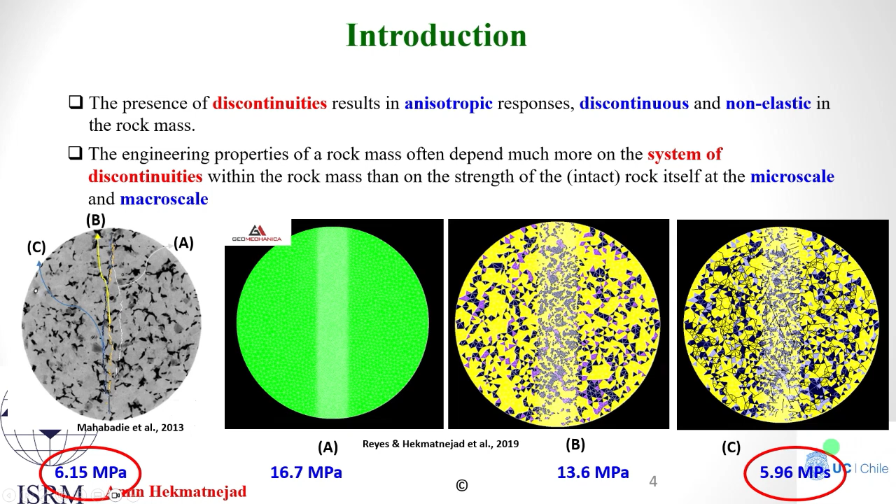We saw incorporating the mineral heterogeneity reduces the error, and incorporating both microcracks and mineral heterogeneity gives us quite better results. And as you can see, the most notable improvement is achieved when microcracks in experiment C are integrated into the model, highlighting the critical influence of the discontinuity system on the actual behavior of rock material.

Moving forward, let's explore how the fracture system influences the perturbation of induced stress, which in turn affects the depth and shape of the induced damage zone around a tunnel. This discussion is informed by research of Lei et al., which examines the impact of natural discontinuities on the stress and damage induced around a tunnel.

This series of experiments, here 9 experiments, illustrates a consistent setup. A circular tunnel with a diameter of 4 meters within a study area of 40 by 40 meters, all subjected to the same stress field with principal stress components of 8 megapascal vertically and 16 megapascal horizontally.

The variable across these 9 experiments is the fracture system parameters, particularly the size of the fracture, which is controlled by factor A, which belongs to the power distribution. The higher value of A means the smaller size of the fractures, and the smaller value of A means larger fracture length.

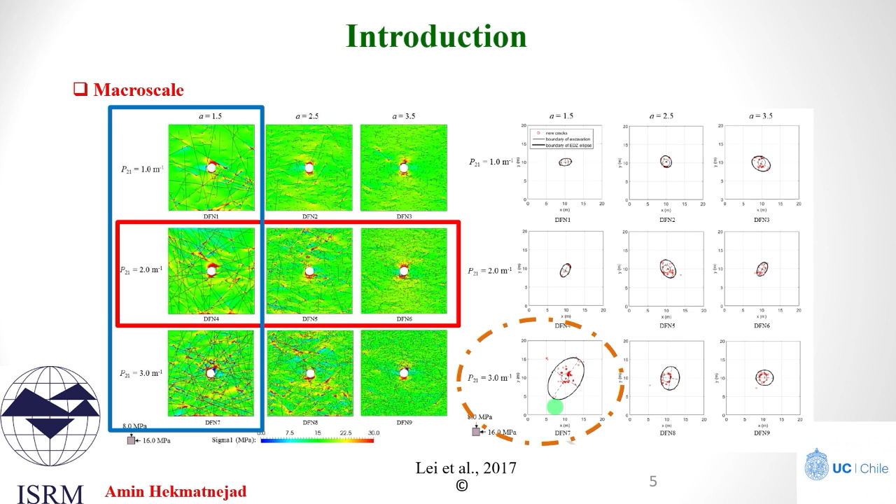In this slide, we introduce the continuous damage model. Referring to this picture, SD denotes the damage area of a specimen. In our model, we consider only fractures as forms of damage, as you can see here, characterized by having two dimensions significantly larger than the third. Obviously, that is in 3D, and in 2D, one dimension is significantly larger than the second dimension. And we exclude any voids.

We define two distinct types of stresses. Apparent stress: this is the stress resulting from the load force F applied to the external surface S of the specimen. And effective stress: this is internal stress which exists within the body of the specimen and is calculated by dividing the force F, as you can see here, by the effective load-bearing area, which is defined as the effective section. S bar is equal to S, the total or external area of the specimen, minus SD, the damaged surface.

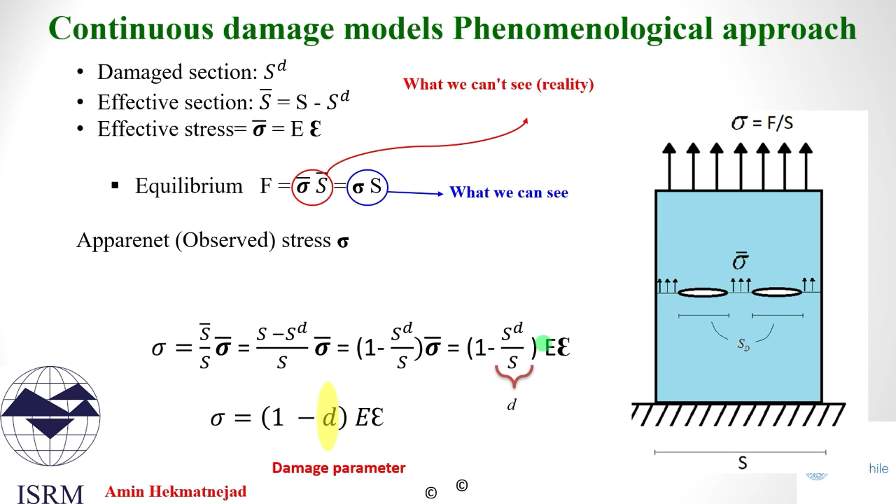Of these three factors, fracture toughness is an intrinsic property of the material. In contrast, the other two factors, discontinuities and the stress fields, are extrinsic, varying with environmental conditions and the nature of the applied load. In this section, we introduce the concept of active and inactive damage as they relate to material failure.

This figure illustrates a scenario where the load direction is perpendicular to the fracture plane, resulting in maximum effective stress and thus maximum contribution to the specimen degradation. In contrast, this picture keeps all parameters the same, except that the fracture planes are now aligned parallel to the load direction. Typically, this would result in the apparent stress aligning with the effective stress, suggesting a damage factor of 0 and implying that the material is undamaged. However, damage does exist. It is merely inactive due to the alignment of discontinuities with the loading direction.

These two extreme examples lead us to discuss damage anisotropy. Damage anisotropy describes the variability in how a material degrades or fails depending on the direction of the applied load. This variability is influenced by the material's internal structure, such as grain alignment and the orientation of existing cracks, which govern its response to different stress orientations.

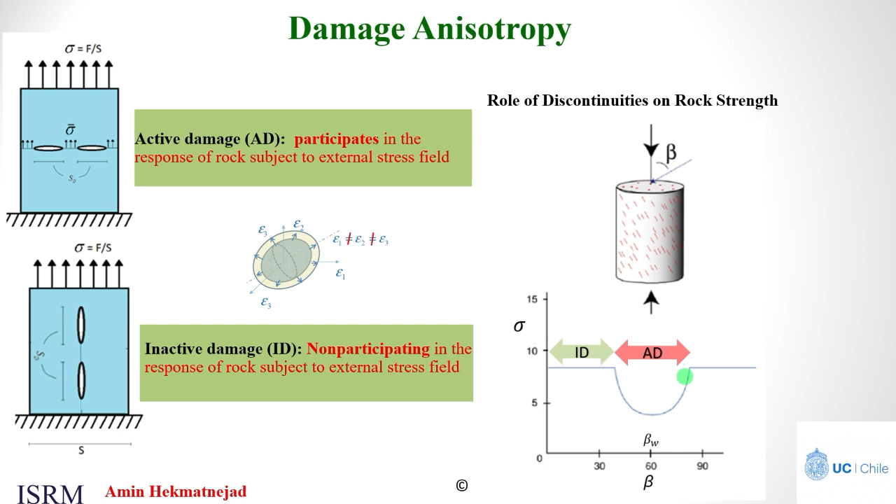In this figure, the specimen strength is lowest under a compressive loading regime when the angle beta between the fracture pole and stress direction reaches a certain threshold, beta W. This diagram can be divided in two parts. Firstly, there is a range of angles where the fractures don't affect strength at all. And secondly, there is a range where the rock strength varies from its minimum here to the strength of intact rock mass, highlighting that the impact of fractures on anisotropic rock strength depends on their relative orientation with the direction of the maximum stress component.

In addition to capturing damage anisotropy, another critical factor in determining the severity of initial damage is assessing the corresponding state of rock on the stress-strain diagram. The figure here shows that within the fracture system, under a specific stress field, only a subset of fractures contribute to the failure mechanism. These active fractures are highlighted in red, also in the stereonet, and are identified according to the Coulomb failure criterion. Failure typically initiates from the tips of these specific fractures. The distribution and relative positioning of these fractures, along with rock engineering design, are essential in determining the progressive and non-progressive damage states, which are essential for assessing the likelihood of system failure.

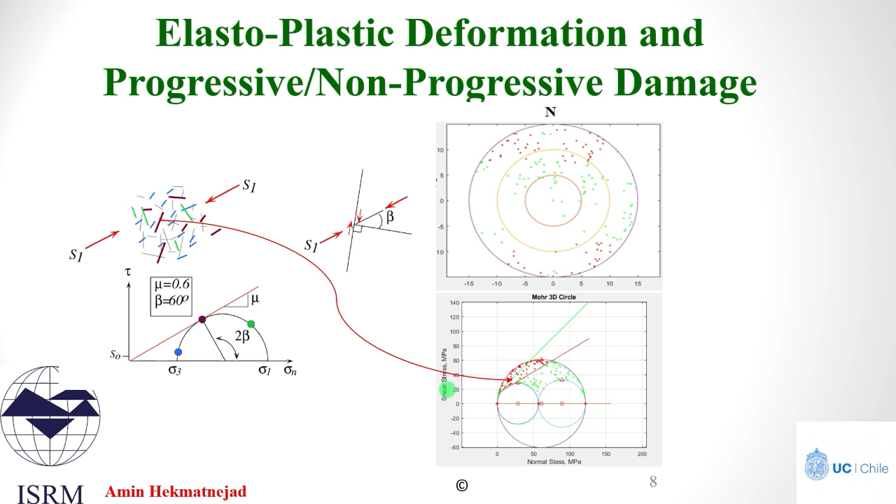In this slide, we explore the concept of kinematic damage behavior and its essential role in macro-scale applications within rock engineering design, with a specific focus on tunneling and slope stability analysis. I'm introducing the extension of this concept into damage characterization for the first time. Kinematic refers to the geometrically possible motion of a system or part of a system without regard to the forces involved.

This figure demonstrates that the free mass, indicating a block that has separated from the main body, will slip when the ratio of shear stress to normal stress exceeds a critical threshold defined by the friction coefficient, denoted by mu. However, in practical scenarios, this condition alone doesn't fully determine the failure of rock blocks. In practical cases, the formation of rock blocks with complex morphology, as illustrated here in the slope scenario, is a critical factor influencing the movement of rock blocks.

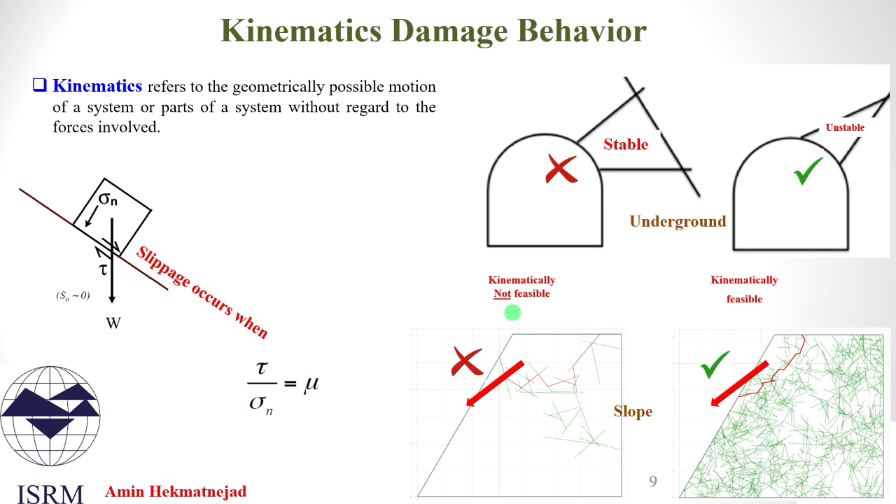The Universal Discontinuity Index represents a novel system for characterizing discontinuous materials, particularly rock. It is important to note that while UD is applicable to any brittle material with pre-existing defects such as cracks or fractures, our focus here is on rock materials and rock engineering designs. UD is a measure of the severity of initial damage for a specific rock engineering design.

As this equation shows, UD comprises four main factors. P32 is the total volumetric fracture intensity, defined as the mean area of fracture per unit volume of rock mass, with units of 1 divided by meter. Circular variance total with respect to the vertical direction is the relative total circular variance that measures the degree of dispersion of the discontinuity orientation from the vertical direction.

Circular variance total with respect to the direction of the maximum principal stress is the total circular variance with respect to the direction of a vector forming an angle beta W with the maximum principal stress. N sub AF is the number of active shear fractures according to the Coulomb friction failure criterion, and N sub TF is the total number of fractures within the rock mass. W1, W2, and W3 are weighting factors that depend on rock engineering design. The connection between these factors, along with their analogues in damage theory and failure mechanism, will be discussed in following slides.

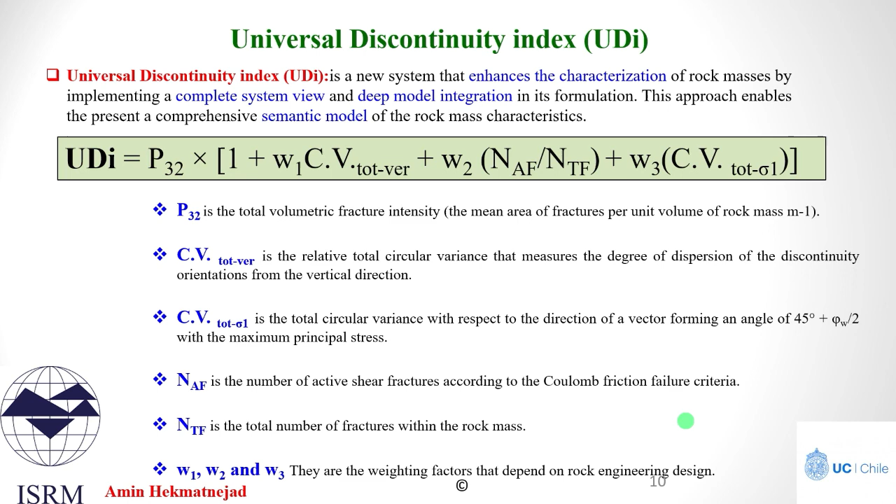The selection of the P32 parameter for the UDi system is multifaceted. First, P32 represents the presence of initial damage within rock. It is a non-directional and additive scalar variable. The P32 definition encapsulates both the size and number of fractures per unit volume of a rock material.

For example, here in this figure, the number of fractures in the rock volume is the same. However, as you can see, the number of fractures alone doesn't reflect the severity of damage. In this case, the P32 is about 0.38, and in this case, the P32 is about 0.01. But the fracture linear intensity, or fracture frequency, in both figures is equal to 10. These characteristics allow P32 to capture the local distribution of fracturing effectively, which is essential for monitoring the evolution of damage.

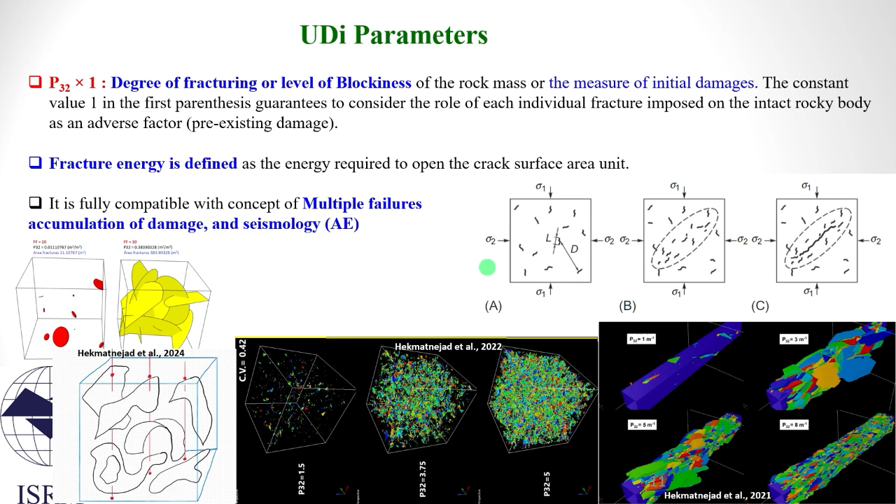Based on the additivity and non-directionality of the P32, we can track the evolution and accumulation of damage. All these together motivate me to consider P32 as an alternative variable for representing the Universal Discontinuity Index, which can be helpful to show the severity of an initial damage.

Video A and B demonstrate how the direction of the fractures impacts the morphology of rock blocks. As previously highlighted, the orientation of fracture relative to the principal stress components and the morphology of rock blocks are crucial for analyzing rock strength anisotropy and the kinematic feasibility of damage. In these examples, as you can see, the P32 value remains consistent for both sets of the experiment. The P32 is 3.

With identical number and area of the fractures, 3 fractures in both cases, and the area of each fracture 3 meters. The key difference lies in the direction of the fractures in each case. In case A, there are 4 rock blocks, each with a volume of 0.25 cubic meters, whereas in case B, there are 8 blocks, each with a volume of 0.125 cubic meters.

So not only the value of the P32 is a crucial factor for the formation of the rock blocks, but also their mutual interaction, which is influenced by the orientation of the fractures. If the fractures tend to intersect each other, the probability of block forming is higher than in the case where all fractures are parallel. This justifies the introduction of the circular variance parameter, which makes it possible to quantify the degree of clustering: all fractures belong to the same group and are parallel, or the fractures are distributed in all directions. This inclusion enables a more comprehensive characterization of initial damage, taking into account the significant role of fracture orientation.

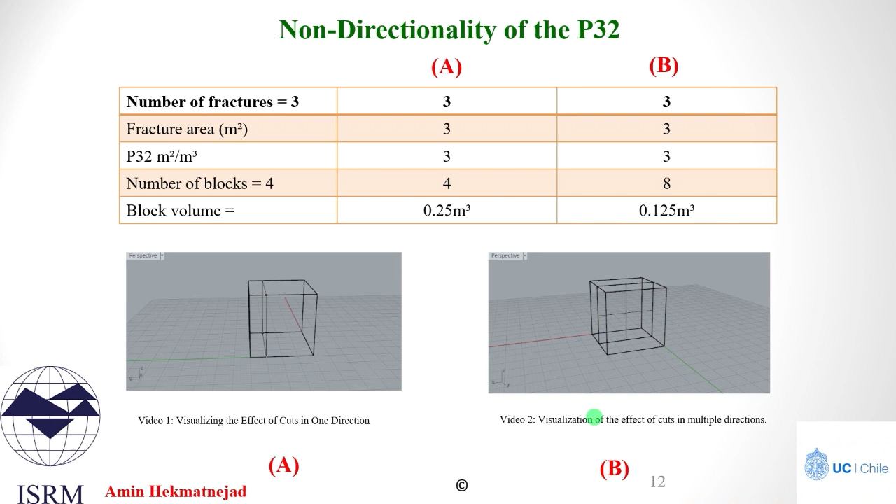Let's see how. As mentioned, the mutual interaction between the P32 and the circular variance representing the orientation of the fractures is crucial to formation of the closed rock blocks. Fracture orientation can be represented by the direction of the unit vector normal to the fracture plane, similar to how univariate data is characterized by measures of central tendency and dispersion. Let's assume we have n fractures, each with a corresponding unit vector. The length of the resultant vector from these unit vectors is denoted as R here.

The circular variance CV is defined as 1 minus R divided by N, where R is the magnitude of the resultant vector, and N is the number of the fracture unit vectors. Notably, the maximum value of R can be N if all vectors are parallel, reflecting identical fracture orientation. In this scenario, the circular variance value is 0. Here, all the fractures are parallel. Here is the concentration of the fracture poles, which is equivalent to the circular variance value equal to 0.

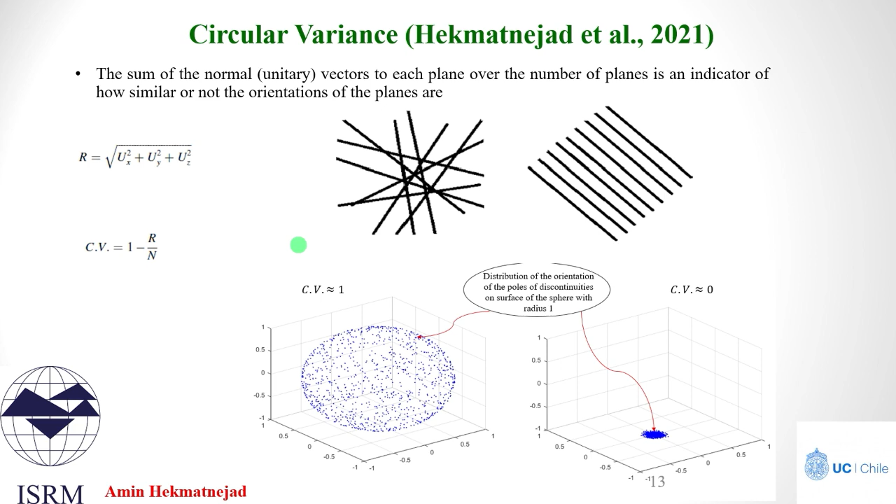All these properties of the circular variance with P32 again allow us to incorporate the important behavior of the fractures and important factors of the fracture system which are critical for the severity of an initial damage. The computation of circular variance in relation to the predefined orientation is crucial for assessing the severity of damage. This innovative approach represents the first time the orientation of fractures has been mathematically integrated into the engineering analysis of fracture systems.

In this context, multiplying the volume fracture intensity by circular variance relative to the vertical direction, as observed in the roof of a tunnel here, and the subvertical direction toward a void space of a tunnel here, highlights the role of the discontinuities that contribute to the formation of potentially kinematically unstable rock blocks and influence the direction of maximum shear stress.

As shown in this picture, it is crucial to accurately assess the direction of a failure along the tunnel walls, where the direction of the block failure on the left wall is toward the right side, and for the right wall it's vice versa. This assessment is made feasible by calculating the circular variance with respect to these predefined failure directions.

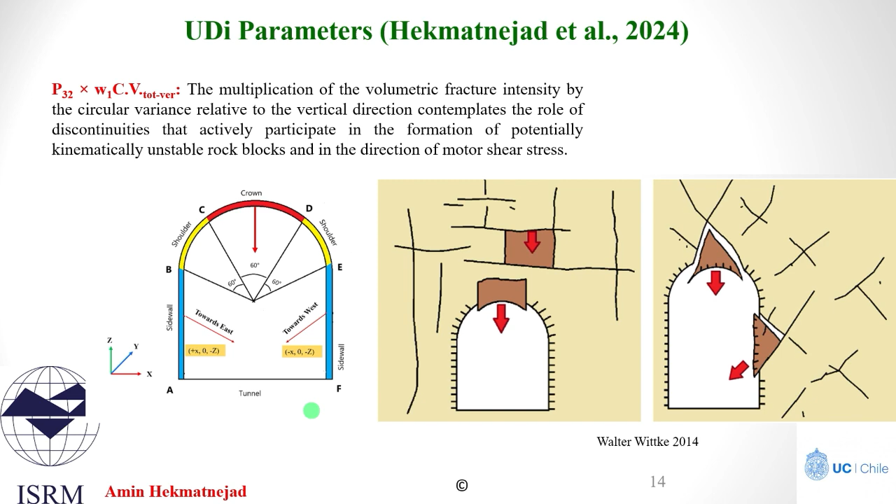It is also worth mentioning that in a separate study, which has been submitted to the Journal of Rock Mechanics and Geotechnical Engineering, we introduced an innovative methodology based on the Universal Discontinuity Index for automated full-scale rock block stability at real time. This methodology is validated theoretically and empirically through a comparison with the well-established hybrid discrete fracture network Warburton approach.

The second factor considers the ratio of fractures that are active for slip along their plane in response to the stress field, compared to the total number of fractures. To classify the active-inactive shear state of fractures, the Coulomb criterion is used. This index is crucial for indicating the evolution of damage in the event of shear failure.

For example, if this ratio is 0, it implies that none of the fractures have the potential for shear failure, suggesting that the rock behavior is similar to that of intact rock and likely not yet at the yielding point. At the yielding point, mode 2 or shear failure becomes more probable and the evolution of damage is more dynamic and progressive.

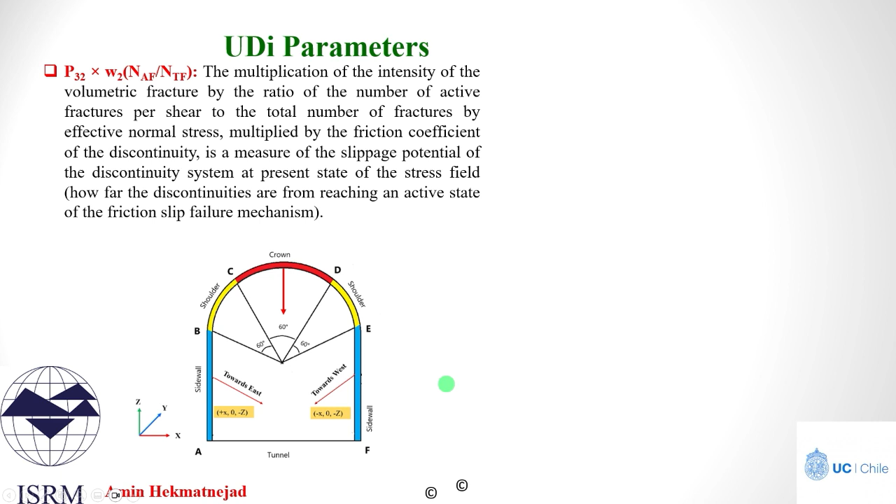To better understand this factor, let's consider dividing the perimeter of a tunnel into several zones: the crown, shoulders, and the wall, as you can see in this figure. Applying this criterion to this section reveals that although there may be many fractures, as you can see, the green dots and the red dots represent all the fractures.

You can see here in 3D Mohr circles, and here the representation of the poles of the fractures in the stereonet. And within the population of all of the fractures, just a portion of these fractures are active, depending on the induced stress and relative orientation of the hoop stress and plane of the fractures, which are prone to trigger slipping of the fractures.

Here, as you can see, the ratio between the number of active fractures to the number of total fractures is high, and we can interpret that we are in such a place in the stress-strain curve, and it means that the initial state of the damage is more progressive, or we are in the elastoplastic part of the stress-strain curve.

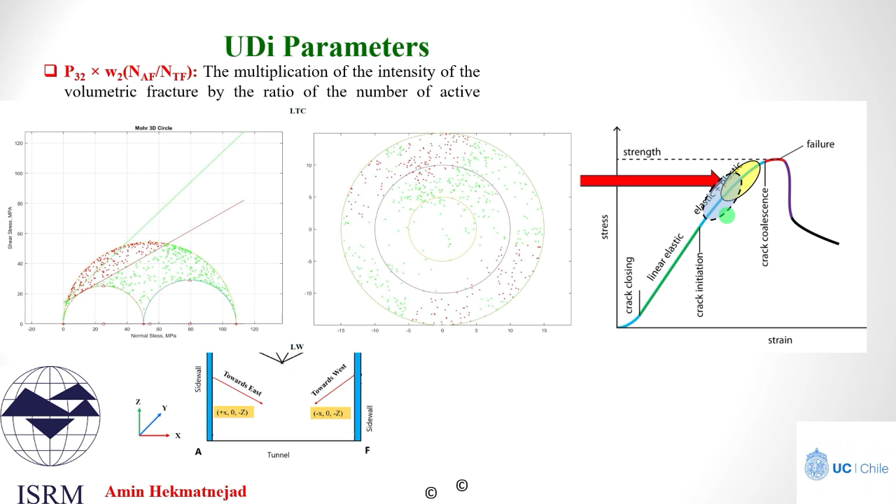And as an interpretation, we can say, in this part of the tunnel, with respect to the crown of the tunnel, we are in a part of the stress-strain curve which has a less progressive initial state of damage.

And for example, in the left wall of the tunnel, as you can see, the number of active fractures is quite low, and we can interpret that we are in the elastic or more elastic part of the stress-strain curve, and the state of damage is not progressive.

Also, interestingly, we can see the role of shear failure at the wall is less significant than in the other two zones of the tunnel, providing insight also about the potential of other failure mechanisms, like block failure instead of shear failure.

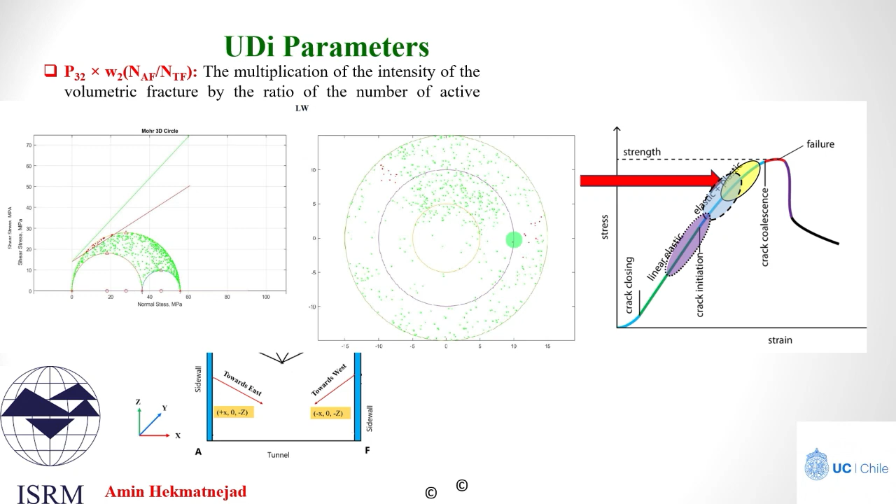Based on what I presented, we can conclude that UDI is a robust measure of the severity of initial damage, based on deterministic and probabilistic damage theory. UDI considers 5 factors among six factors that are influencing the severity of damage, including the factors of stress, the magnitude of the stress and its distribution, and the factors related to the discontinuity population, including size, orientation, and location.

Also, UDI has a unit of measurement, one divided by meter. UDI is based on the complete system view and model integration. The Universal Discontinuity Index, based on its formulation, is an objective system for characterizing rock mass. And also, UDI can be applied from lab scale to real scale practices.